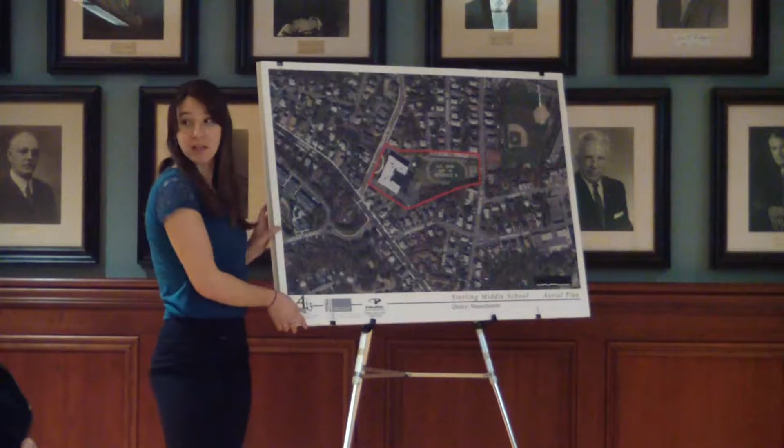Introduce yourself. Sure. So, Lindsay Mockamer, like Brian said, I'm here with Pare Corporation. We're the civil engineer of record for the project. So I'd like to just give you an overview of the project: summarize the existing conditions, explain a little bit of the design process we went through, and describe the proposed impacts, including impacts to the floodplain. So just to start off, is this a good position for the plans to be here? You all set? Okay. So we have an aerial of the site.

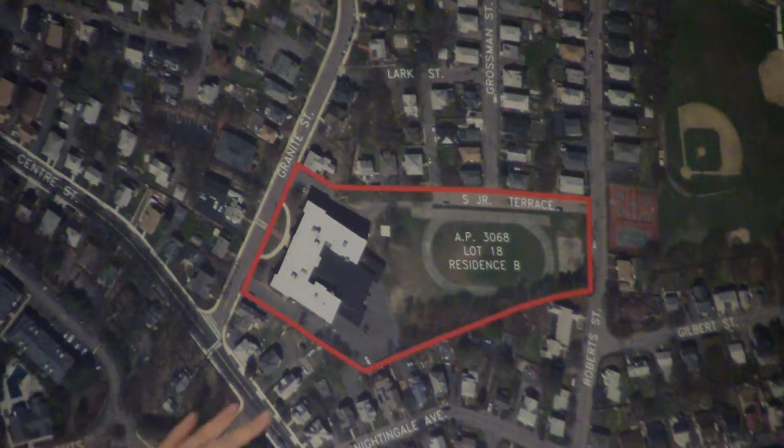The property line is shown here in red. The site is a little less than 4.5 acres total area. And just to orient you, we've got Granite Street to the west here and Roberts Street to the east. And then there's 2 side streets that come down to the site, Grossman Street and South Junior Terrace, that come onto an on-site driveway along the northern property line. So primarily surrounded by residential properties and Kincaid Park over to the east.

So the current site layout, we've got the existing school building up pretty close to Granite Street here. And if you're familiar with the site, there's a pretty significant grade change across the site from east to west. We're 25 to 30 feet lower on this portion. There's a pretty big drop off along the back of the school. So in the rear of the site, you've got an existing bituminous track, the driveway I mentioned, and a little basketball court there. A little less than 50% of the site area is impervious in the existing conditions.

Generally, the way the site drains today, it follows the topography. So from east to west, it drains overland and partially to on-site catch basins, to subsurface drains, which connect to 2 points in Roberts Street. There's a drain main in Roberts Street. So our analysis point in considering drainage design was at this corner of the property here in the main in Roberts Street. In terms of other utilities, the current building is serviced by town water and town sewer and gas and electricity.

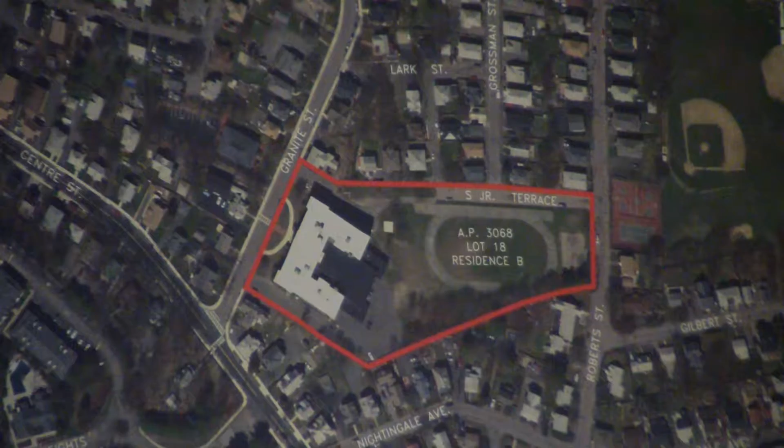So some of the investigations we did to do our due diligence on the site included a traffic impact analysis, environmental site assessment phase 1, geotechnical investigations, and investigations for wetlands, at which time we determined that there was a bordering land subject to flooding on the site with the 100-year flood elevation at elevation 29. So most of this portion of the site from the bottom of the slope eastward is within that floodplain. So the main building is not within it? Correct. So just to give you elevation, 29 is the floodplain elevation. The current building's finished floor of the main floor is set at elevation 56. So that's where we are.

To our proposed site plan. So this is the site plan, same orientation. We've got Granite Street to the west here and Roberts Street to the east. The existing building is shown with a red outline here for your reference. And the floodplain line is shown in the dark blue here.

So the proposed layout, we've got the new building here. And as Brian mentioned, there's going to be a little bit of a phased construction process that happens. So most of the existing building will stay in place while the new one's being constructed. So we're tucking it between that floodplain line and the existing building.

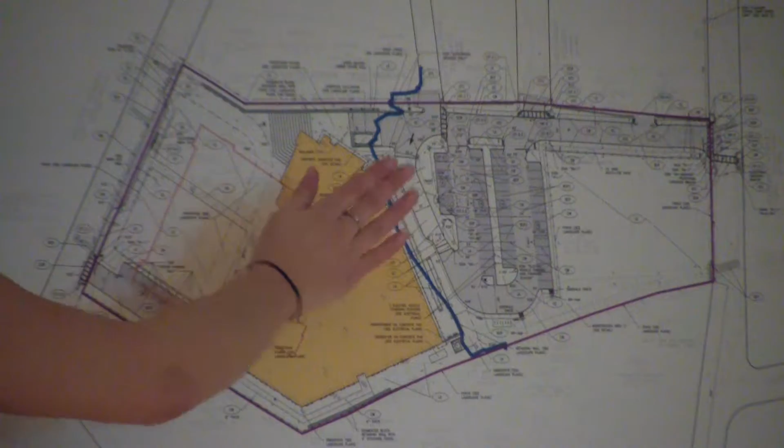In terms of elevations, the finished floor of the lower floor of the building is set 1 foot above the floodplain elevation, so at elevation 30. The lower floor has a walkout onto the Roberts Street side, and the second floor has a walkout 28 feet higher onto the Granite Street side. So we're keeping that same slope across the site.

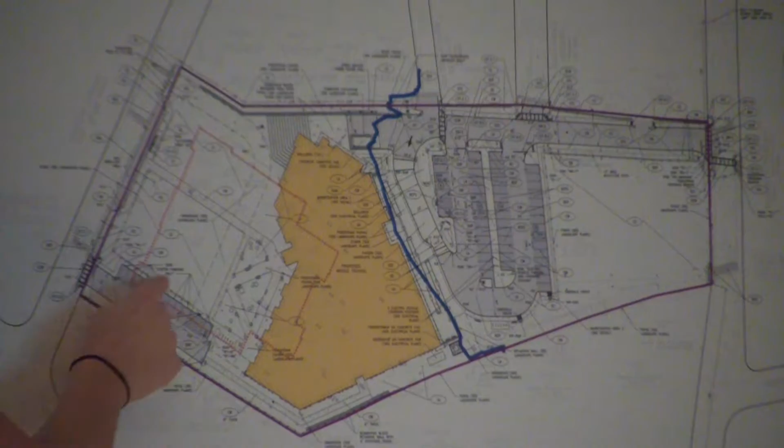And on the front lawn, we've got a pretty significant grass area out in the front for some recess activities. There will be bus drop-off happening along Granite Street, and there's a little parking area for visitors in the front here. In the rear of the site, we've got an on-site parking lot for staff and faculty, and there is a drop-off loop for parent drop-off.

We're maintaining this on-site driveway along the northern property line, but we are planning to improve it with sidewalks and actually a bike lane along the side here. And then there is a grass field for sports and recreation for the students.

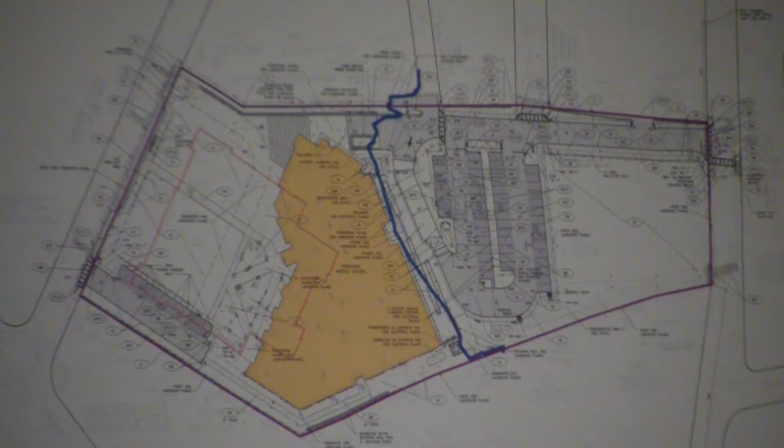Utilities are going to be similar in the proposed condition. We've actually been coordinating with the Department of Public Works to make sure we're connecting in the appropriate locations, so it'll still be town water and sewer, and also gas and electricity. Drainage, we have designed in accordance with the Mass Stormwater Handbook. So we have a mix of redevelopment and new development on the site. We have a slight increase in the amount of impervious area, about 13,000 square feet. Actually, let me flip to the drainage plan.

The site was designed to provide the recharge that we needed to match the peak off-site flows for all of the design storms and to provide adequate treatment for the impervious areas. So just to give you a little bit of a summary, the impervious area of this parking lot to the west here drains to an infiltration system that I've highlighted in green. We're taking advantage of some good sandy soils up here where we have really good clearance to groundwater to get the recharge that we need.

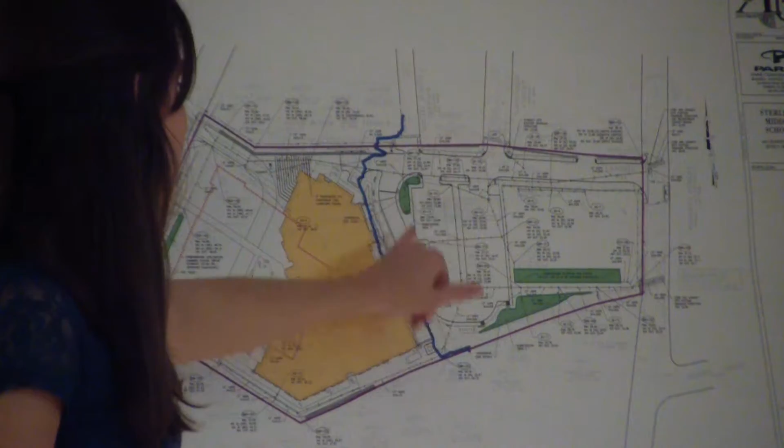The parking areas on the east of the site and the driveway here drain to 2 separate bioretention areas, one in green here and one along the southern property line. And those are going to act as filtering systems, so the stormwater will filter through the media to an underdrain that connects to the closed drainage system.

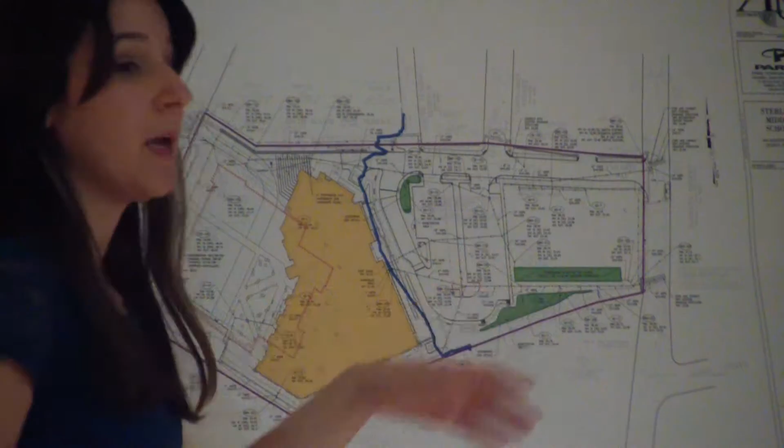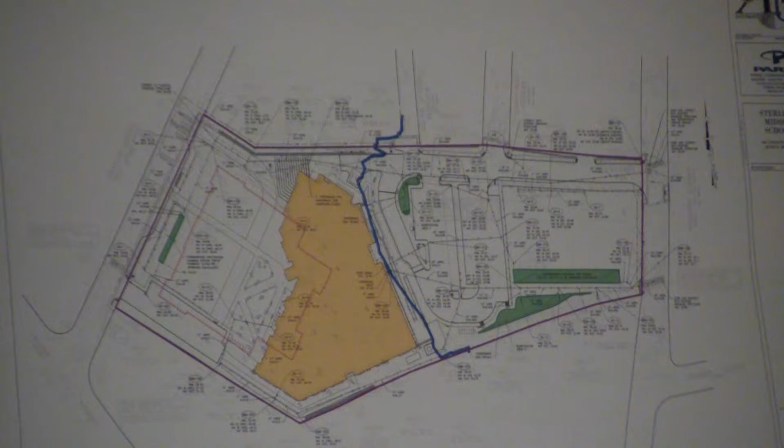And the roof area is directed to a closed pipe detention system, which is going to be below grade in this field here, so that we can slow the flows and match the peak flows off-site in our 2, 10, 25, and 100-year storm. So that generally summarizes drainage. Again, we have been working with the DPW, and they've had discussions about the design, and at this point, we understand that we've satisfied their requirements for the drainage design, but we're certainly happy to answer any more questions.

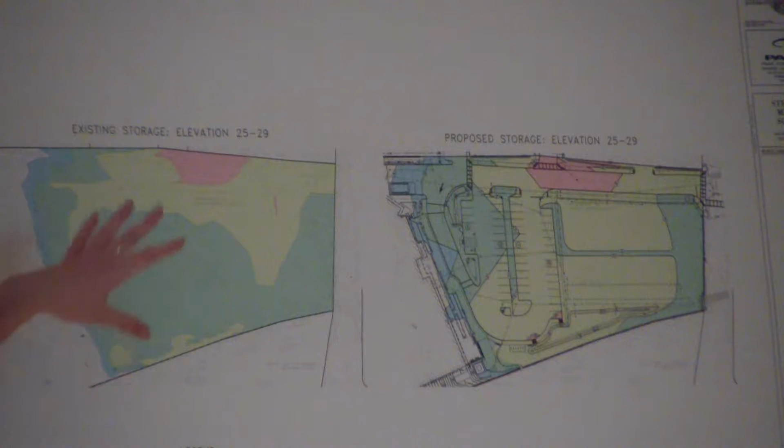And then finally, I'll summarize the flood storage calculations that we did. This is actually the figure that was attachment 6 in the NOI report. And I actually brought with me here, and I have copies for each of you, a revised version of this plan.

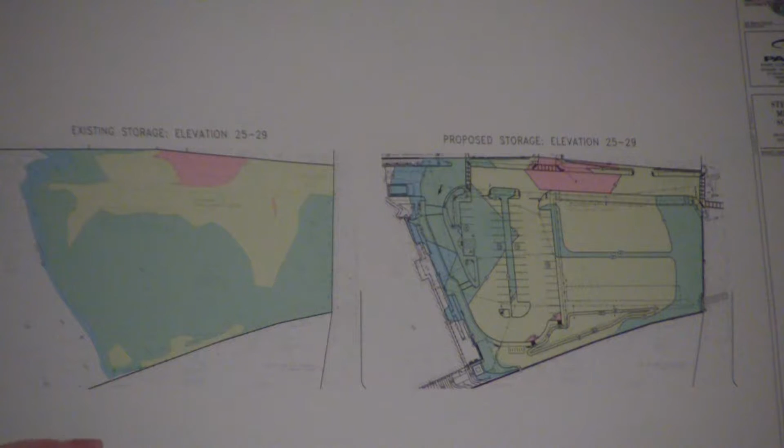And I'm hoping that it will be able to replace the version that is in the report. So there were some minor modifications from the original submission on the 13th to some grading that was right at the edge of the building. But first, I'll summarize what's on this plan for you. It still does meet the requirements of the regulations. So we have shown in each color the area on the site which is incrementally between each elevation below the floodplain elevation. So we're showing that the flood storage from the existing condition incrementally is matched or increased in the proposed condition. So if it's all right, I'll grab those plans and give you each a copy of this.

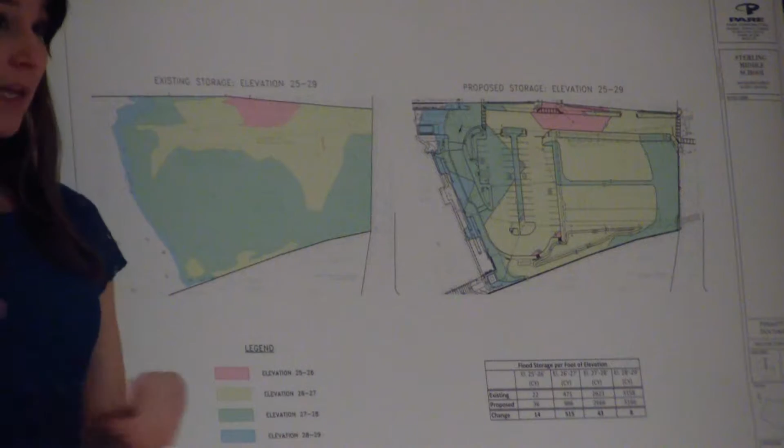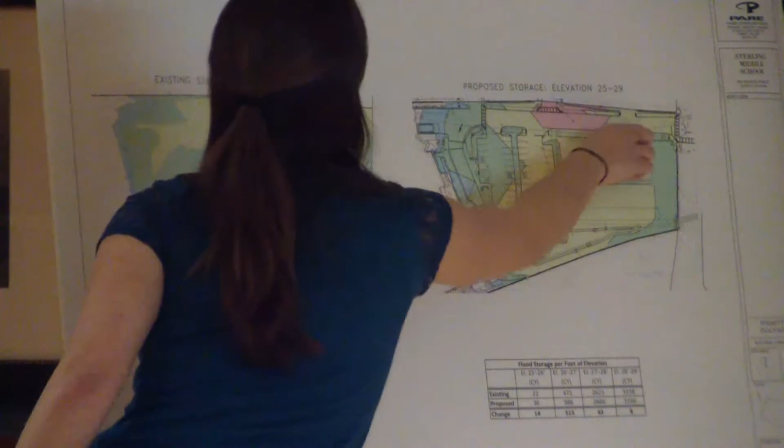There's just a question about that plan there, though. Basically by putting the building on the slope, you're going to change the entrance to be now at the lower end. This is actually an entrance area here? This will be a driveway? This here? Yeah. Yep, so this driveway we're matching; there is the on-site driveway right now. We're changing it because we're putting sidewalks along it, but we're generally matching its layout.

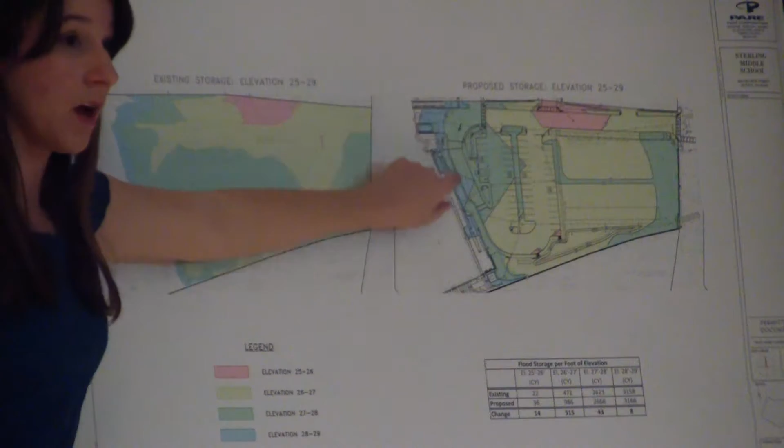But this turnaround area in here, which is in the resource area, is the new entrance to the school? Yes. Rather than the front other side? Well, both have entrances. This will be the main entrance? Yep, so there'll be the parent drop-off that happens along this driveway here, and there's a walkout from this elevation. And this parking lot is for faculty and staff. Oh, it's faculty parking. Yep, and then the upper floor, there'll be bus drop-off here. So this will primarily be the main entrance, but this will function like a main entrance as well. Okay. And that's in the resource area, the building is not?

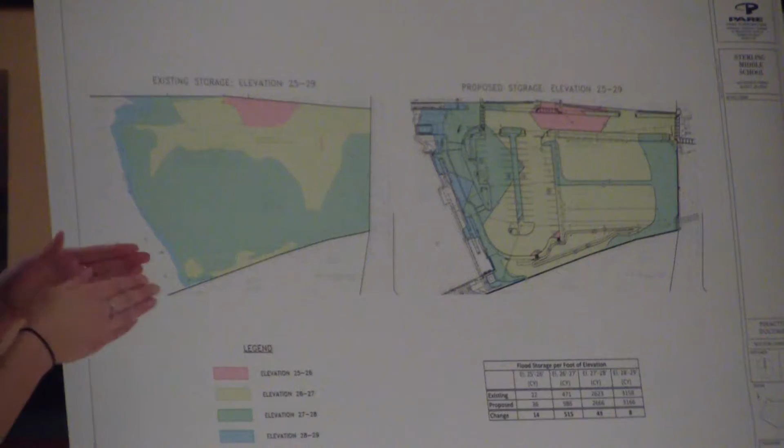Correct. Okay. And how are you matching the drainage there? How are we matching the drainage? Because it was non-paved area, right? Yep, so there was some existing paved area. It was not parking area, but it was track, right? Track. So in terms of matching the drainage, we're pitching the parking lot so it's higher in the center, moving it to either side for treatment in the bioretention area here and here. So that's primarily how we're handling runoff from this parking area.

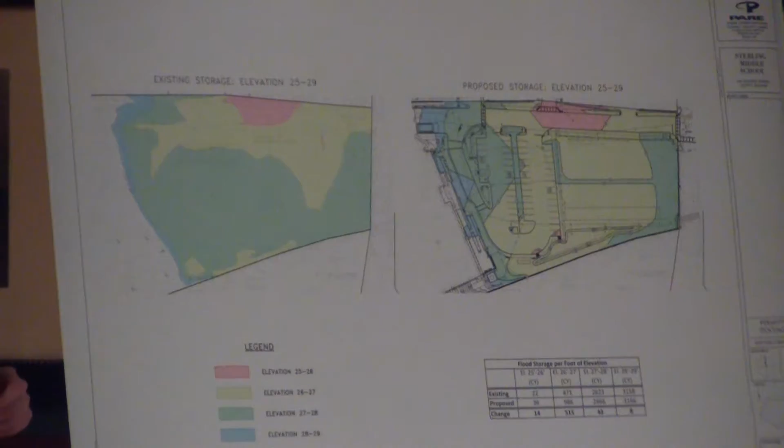Are you proposing to replace the athletic fields, or what's going to be there? You're referring to the track. Yeah. The track isn't going to be replaced, but there's a larger plan for the city to address that within the fields that are across the street. But there'll be an activity area at the top and below that can be used. There's just going to be green area? Green, that's right.

Has this been in front of the city council? Yes, it has. In the summer the city council approved the project. They approved the funding for it. There's an appropriation of $56 million.